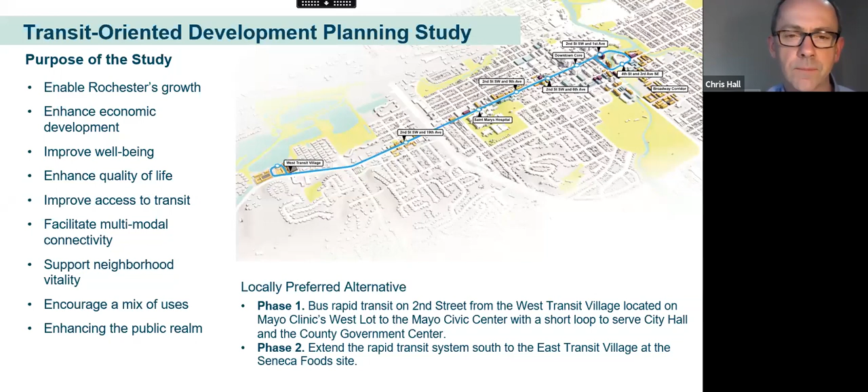And of course, there's a long background to this. This is the culmination of a series of plans which have happened over the last decade or so, and also they're a springboard for continued studies and investigations. This is certainly not the end of the line.

It's a way station on the way, and it's a level of study that takes things to the next level of detail, but then provides a platform for architecture, engineering, and more detailed funding applications and design studies.

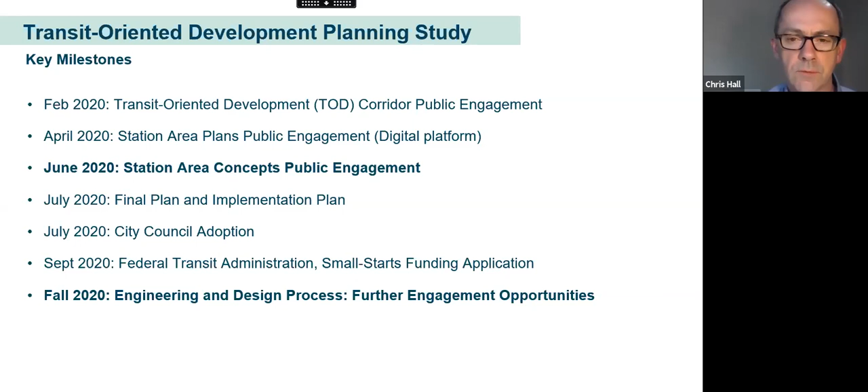Some of the key milestones, if you attended some of the previous webinars and presentations, you'll be familiar with this. But essentially at this point, we're in a public engagement round looking at station area concepts, and that leads to a series of decisions and finalization of this plan, which then becomes the basis for further engineering and design detail processes that will begin over the summer and really move in full speed ahead in the fall this year. So moving on to the vision.

There are 3 key principles we wanted to promote through this process, and we stepped back right at the beginning, and these are concepts that we established early on and which have continued through the process. We want to prioritize well-being.

Rochester is a city that's got great open spaces. It's got larger lakes, it has creeks, it's got rivers. It has a series of connections to open spaces and nature. We really wanted to make sure that people could have enhanced access to those spaces as a result of this transit. So we've spent a lot of time investigating how you can improve connections to open spaces, supporting well-being in terms of exercise and health, but also providing a framework which allows people to walk instead of drive and to bike around as well.

A strong mobility network is about how this rapid transit route also connects to enhanced bike connections and enhanced pedestrian frameworks around immediate station areas, allowing people to move around in healthy ways, but also move around very efficiently between home and places of work, and to get to retail and other services and community services they need. And then, guiding smart growth.

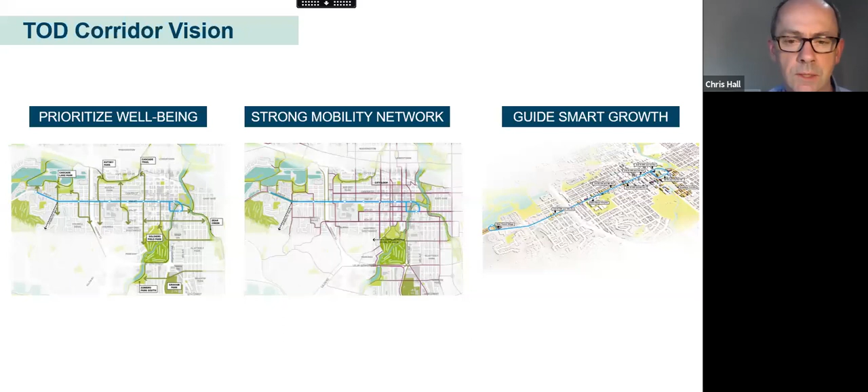We really want this to be a smart way to achieve the city's growth goals by organizing future development in a way that relates to transit, but also making sure we get the right kind of development - retail, community services, affordable housing - so that all of the needs that today's and future residents have can be met within the city. So those are the 3 underlying principles, and you'll see some of these ideas come through as we investigate in detail.

As we mentioned before, we're organizing the rapid transit route into a series of districts: the West Gateway, between Highway 52 and out to the West Transit Village; what we're calling the City Corridor, which encompasses St. Mary's to 6th Avenue; and the downtown core, which is 6th Avenue around to the government center. Those are the 3 main phases we're focusing on tonight and as part of this process.

And then, of course, there'll be a future phase relating to the downtown southeast waterfront and the Broadway corridor. That will be aligned to further investigation of the 2nd phase of the locally preferred alternative for the transit route - investigation of future extensions to the south, which will impact the Broadway corridor and the downtown southeast waterfront area.

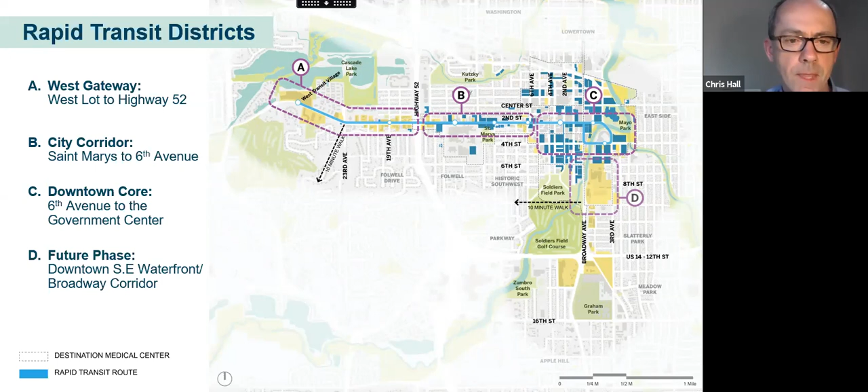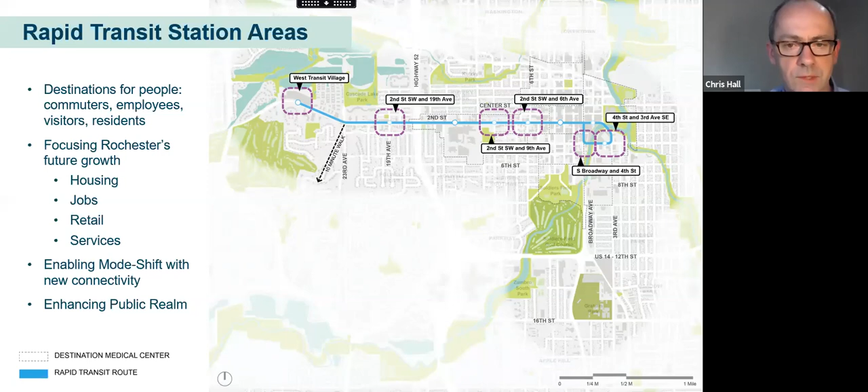So tonight we're going to look at a series of station areas. These are examples - it's a range of stations and locations, not every single one, which will be really serviced by rapid transit and have the potential to see transformation. These are places that are destinations, but also places where we can expect to see future evolution of housing, jobs, retail, and services, and also the places where we actually enable this mode shift - where people are able to get out of their cars and use transit, walking, biking. These are the hubs where that becomes a reality.

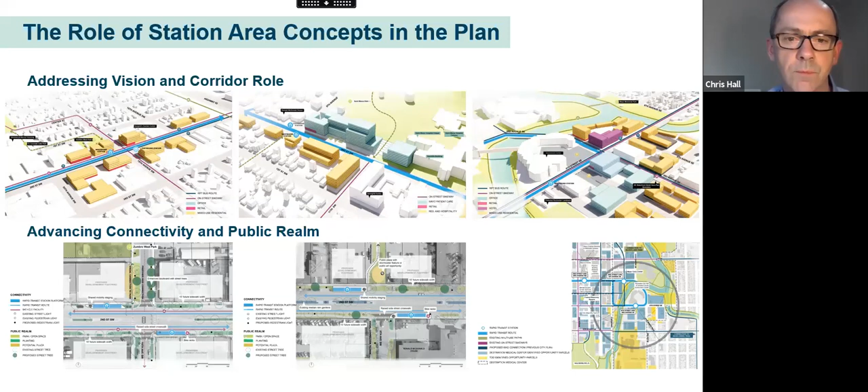What you'll see through this presentation and also the information that's online is a series of station area concepts. Those consider the vision and the role in terms of the future evolution of those station areas in terms of development, but also how we advance connectivity and how we enhance the public realm. These are examples of what we'll go through in a little more detail in a moment - the kind of information that we'll be presenting next.

The kind of things that we're interested in hearing back on are: how can we enhance these station area concepts? What type of retail or community amenities could be included, and how is that different between different stations? How can we enhance our ideas for public spaces, which again have different functions and different numbers of people using them? And then, how can we encourage people to walk or bike to the rapid transit stop? So that may be some ideas you have about how we can enhance some of the connections that we're proposing.

So we'll talk through each segment and station area in turn, and Joni Gies with SRF Consulting will also be joining me in this, introducing the ideas around public realm and connectivity in particular.

So the first area we're looking at is the West Gateway, on 2nd Street Southwest, west of Highway 52. We see this area as an activated urban corridor and a point of arrival for employees and visitors.

This is a location that has connections right now, with quite extensive trail connectivity around Cascade Lake. But what we want to do is enhance the connectivity in this area, extending bike connections and the streetscape framework established on 2nd Street Southwest out as far as 23rd, extending it further west on 2nd Street Southwest to create a more comprehensive network throughout this area.

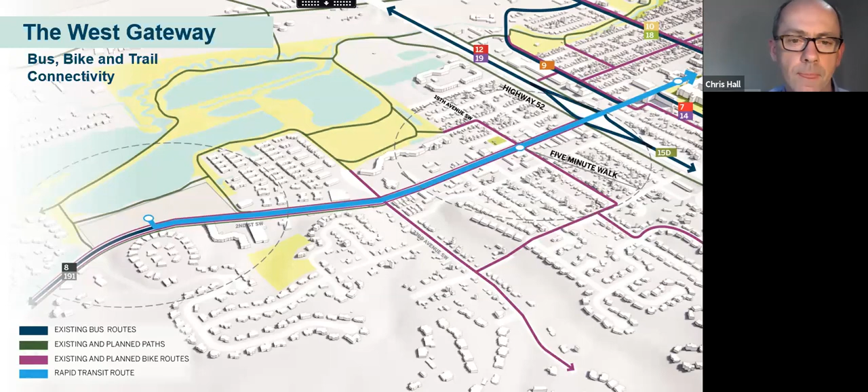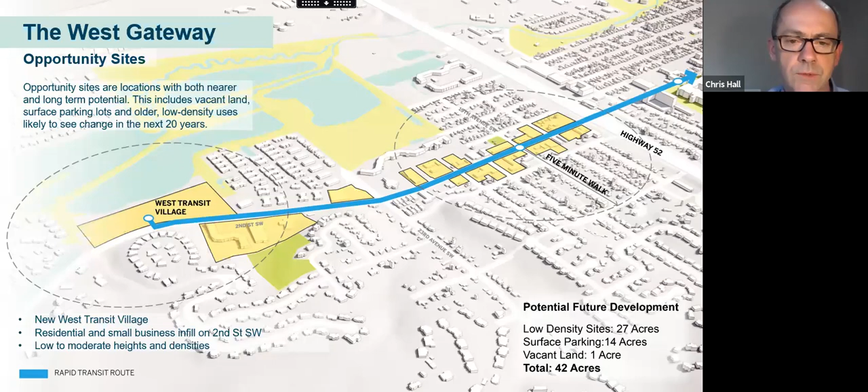We're also looking at future potential opportunities for new development. This is an initial assessment of areas that could see change over the next 20 years, including surface parking areas and some lower density, auto-oriented development which over time could be replaced. It's important to say we're not mandating this change - we're providing a framework within which individual property owners and businesses can make their own decisions. But we anticipate over the next 20 years many will see real opportunity, particularly with rapid transit coming into service.

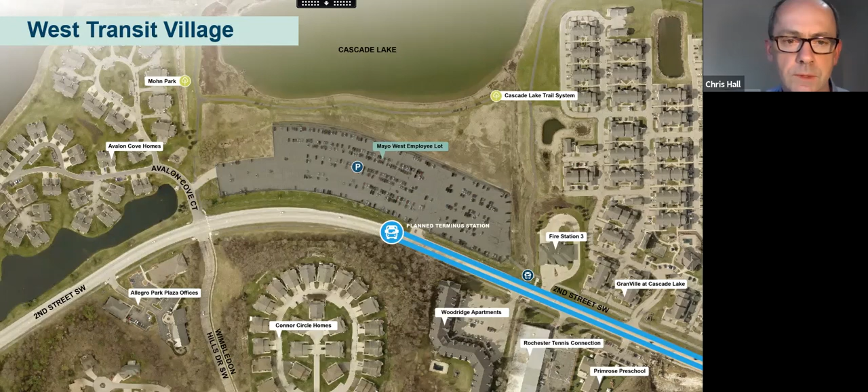Our overarching principles for the West Transit Village are to promote mixed use - residential, retail, potentially some small local office, maybe some smaller spaces for community services. It's a major pickup point for people coming to parking facilities and making a direct transfer onto transit, allowing them to get to downtown without driving in. There will be many activities here.

Mixed use buildings should have very active ground floors. We want high degrees of transparency, a sense that people are in the buildings, a relationship between what's happening inside and what's happening on the street. Streets should be lushly and richly landscaped, and designed to support walking, biking, and transit.

This is also an opportunity for new homes for Rochester residents. We're really interested in seeing local needs met as part of this process as well.

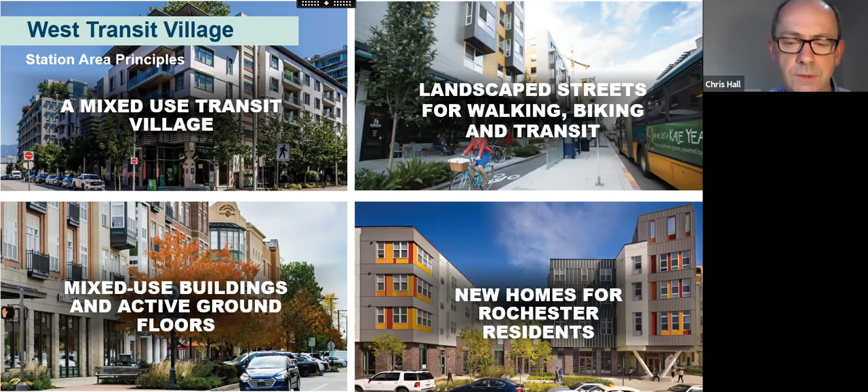This is the framework being proposed, with lots of details still to work out through subsequent phases. The fundamental idea is that the transit route would come west, turn into the site, have a short loop back on itself through the site, then back out onto 2nd Street again. The station would be on the interior of the site. The loop street would be very close to a parking facility, but it's also where we would focus retail and service activity.

We see the potential here for residential development through the balance of the site. There will be other parking facilities, either purely for public use or for resident use, along with a series of blocks and residential development opportunities organized around high quality streets, and also around a new public space - a strong public space for use by everybody, public to the whole city, to all residents.

That space will connect through from 2nd Street Southwest through the site and then out to Cascade Lake. This is also an opportunity to enhance bike connections so that people traveling to Cascade Lake, cycling or hiking around, can also get out to 2nd Street or vice versa.

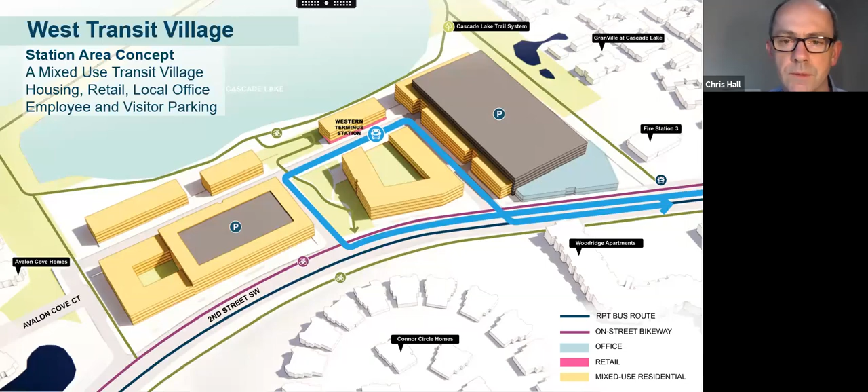We also think 2nd Street will become a really strong address as well. Development comes up 2nd Street, homes will face 2nd Street, and it will become more normalized - less of a suburban highway with a surface parking lot, and much more part of the fabric of the city. So next - Joni, do you want to talk through the public realm?

As Chris had stated, one of the really big moves from an urban design perspective is this significant green space in the heart of the West Transit Village that is making both a visual and a physical connection between 2nd Street and Cascade Lake.

We really want this district to be very supportive of walking. So all the streets are proposed to be lined with generous sidewalks, street trees, and pedestrian scale lighting to enhance safety and security as people move through the district, supporting walking for commuters, retail users, residents, and visitors.

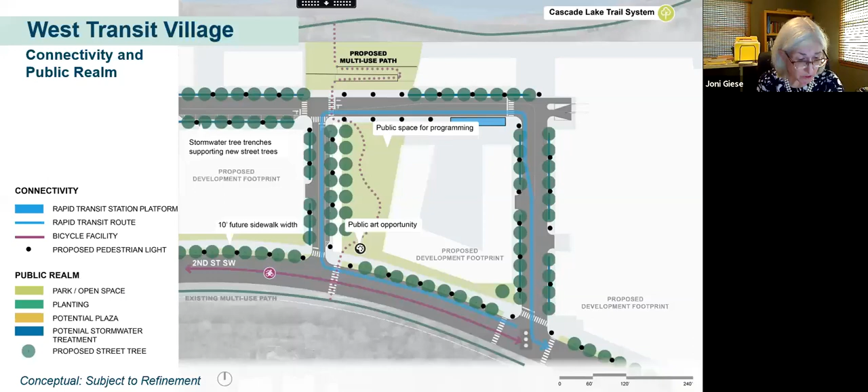In addition, this concept proposes some sustainability principles, such as harvesting stormwater from the site and using that stormwater to irrigate the new street trees along our streetscape.

This is a section through 2nd Street, as you can see in the upper right-hand corner, looking east towards downtown. Currently the streetscape treatment on 2nd stops at 23rd Avenue. As Chris was talking about, a very important move being recommended is to extend that streetscape treatment out to the West Transit Village, creating a very walkable neighborhood that people would be comfortable moving through between the West Transit Village and uses further to the east.

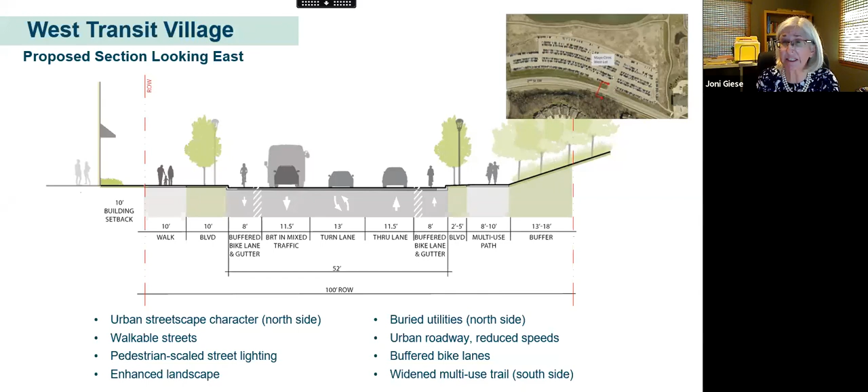That means incorporating pathways on both sides, set back from the street with a landscape boulevard that includes street trees and pedestrian scaled lighting. We're showing buffered bike lanes to improve comfort for bicyclists, and we're showing the buildings in the West Transit Village coming up close to the street so they help create the street and define it as a public realm space that people are comfortable inhabiting.

Okay, so the next area we want to look at is on 2nd Street and 19th Avenue.

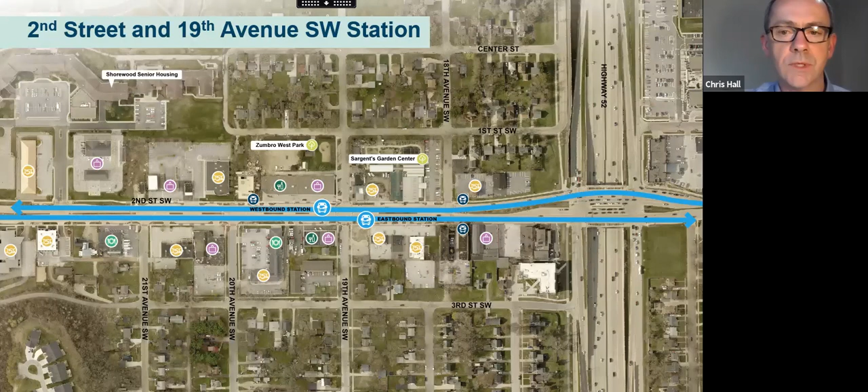We think this is a great opportunity to create a new community hub, a place where existing residents could come for shopping and services, a place some existing residents may want to relocate to, and a place future residents can live. This would be transit-oriented development that also incorporates retail services, community services, enhanced streetscape and public realm, and places for people to gather.

We see this as a very vibrant local neighborhood hub with a range of activities that is very attractive, and that attractiveness also encourages people to walk and bike to this location where they can access transit.

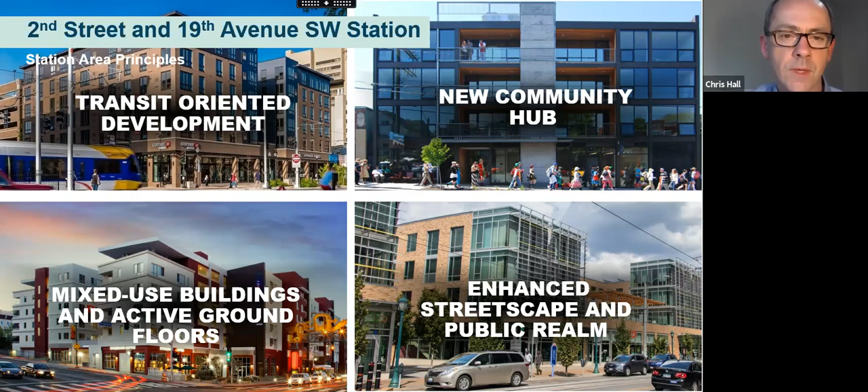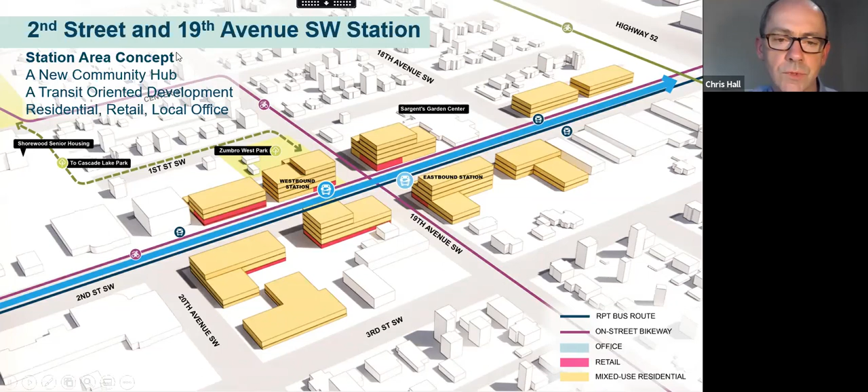Buildings may become more residential further from the intersection, and may step down in height as well, but we hope this will be a really connected place. We have ideas for creating and enhancing bike connections through to Cascade Lake Park and enhancing pedestrian connections via Zumbro West Park. This would be a neighborhood hub at neighborhood scale, with 4- and 5-story buildings right around the intersection, and active retail and ground floor spaces.

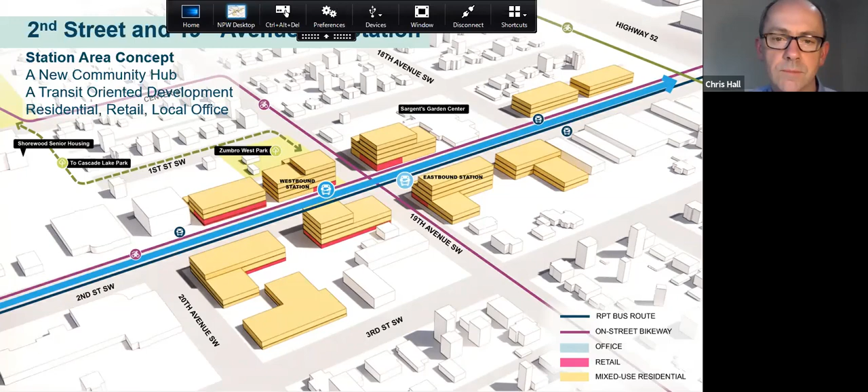From the public realm, the light blue boxes indicate where the proposed transit platforms would be located. Adjacent to those platforms, the idea is to provide space for people to securely store their bicycles if they'd like to bike to these transit stops, and also places to stage shared mobility, such as motorized scooters. This node already has some significant and really nice streetscaping.

The goal is, as redevelopment occurs, to continue to reinforce and strengthen that streetscape to create a comfortable walking experience for neighborhood residents walking to the platforms and to the businesses along 2nd Street. The concept also shows raised crosswalks along 19th Avenue.

This will keep the crosswalk at the same elevation as the adjacent sidewalks. We see this as a benefit for pedestrians, particularly those using mobility devices, because they will stay up at the sidewalk level, not having to go down to the street and back up.

Another move we are proposing in this concept is a pedestrian plaza along 19th Avenue. That plaza will help create a visual connection to Zumbro West Park just to the north, so people understand there's a park nearby that can be used.

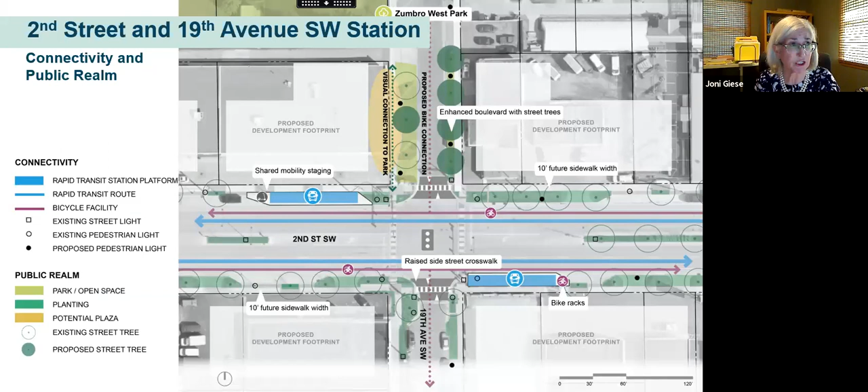We're showing dedicated travel lanes in the street for business access and transit, labeled as BAT lanes. In addition, we're preserving the bicycle lanes that currently exist on the street today.

To be consistent with the zoning code for this area, which is a TOD corridor, we are providing generous 10-foot sidewalks on both sides of the street, set back from the roadway with landscape boulevards.

The buildings are placed so that they come up closer to the street edge, to the right of way, to once again help define that street as a public realm space.

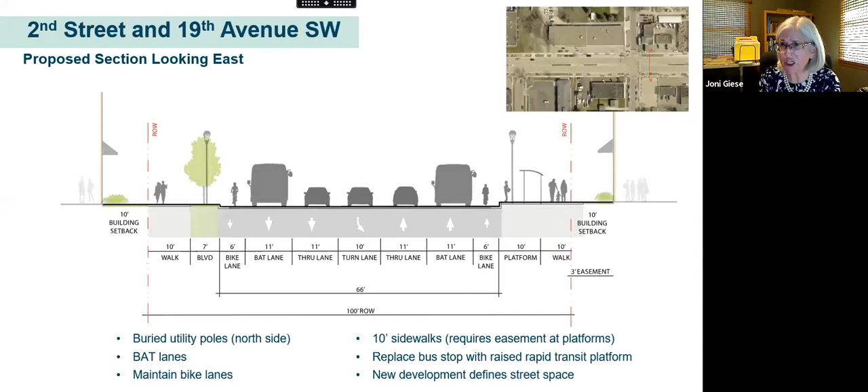Depending on the uses that occur in these buildings, if they are retail, the space between the building frontage and the right of way could be designed to support that retail usage and further activate the street space.

Next. I think we wanted to stop at this point and give people the opportunity, if there are any immediate questions, whether about the study overall or any of the specifics you've seen for these two locations, to ask them now.

Actually, we have a couple questions coming in, but Paula raised her hand. Joni, can you help me get Paula unmuted so she can ask her question? Paula, are you there? Looks like she's muted, Joni. Okay, something with a rollover, I couldn't get the arrow to click unmute.

I have three or four short questions. My first is actually a compliment that y'all are doing raised crosswalks. I'm a person with disabilities, I have multiple sclerosis, and I've been advocating for raised crosswalks because they make it easier for me to get around and for people with low vision, as well as for safety, since they act as a traffic suppressor subconsciously.

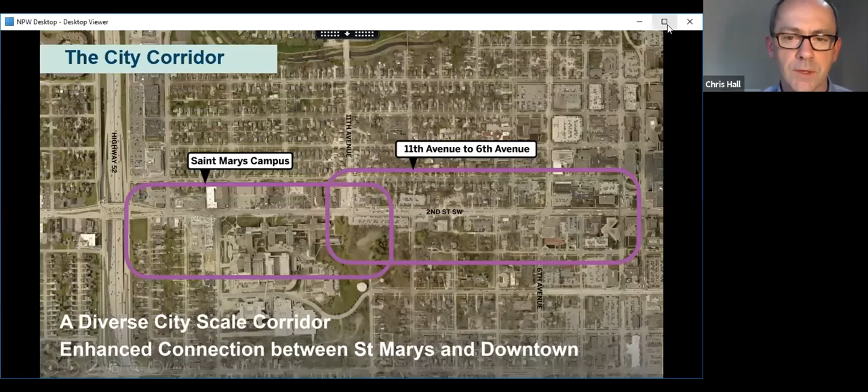So this encompasses the St. Mary's campus and then also the 2nd Street corridor from 11th to 6th. We really see this as part of the central city. Cities are growing along their corridors now, and traditional downtowns are changing in many ways in terms of function and activity. So we see this as a diverse city scale corridor, an extension of the traditional core, and an opportunity to enhance connections between St. Mary's and downtown and core Mayo Clinic facilities as well.

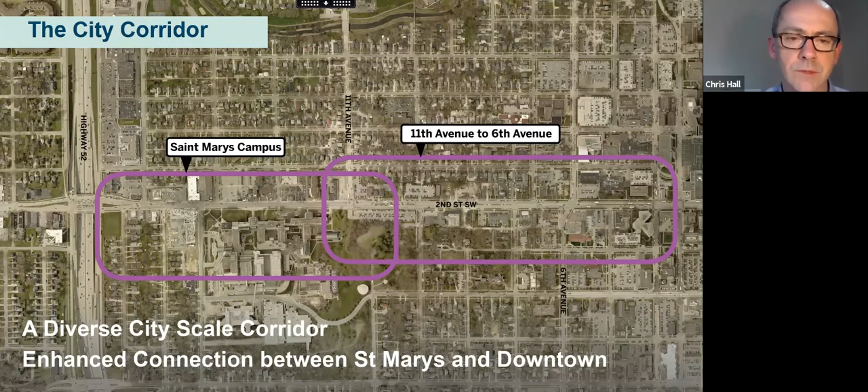So a series of proposals for enhancing connectivity for this area as well. It's very well connected in many ways, and we're proposing 3 station locations: one right at St. Mary's Hospital entrance on 2nd Street, one around 9th Avenue, and one around 6th Avenue. These are around a 5-minute walk or quarter-mile spacing, which is typically what we see in more urban districts.

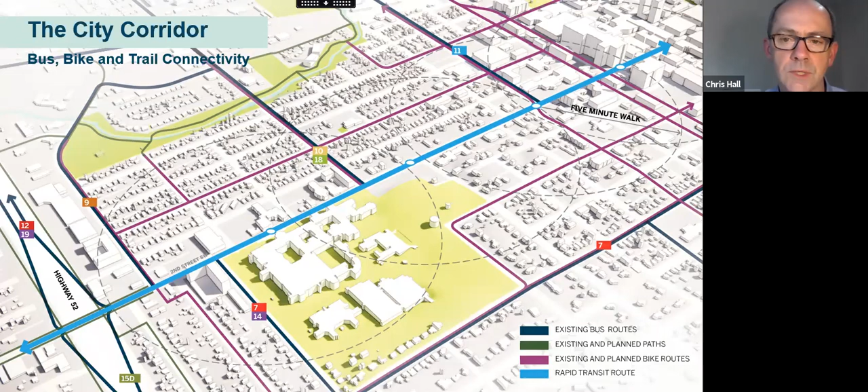And again, a series of opportunities that could arise over the next 20 years. One of the areas we're really interested in and focusing on, as it's been subject to previous planning and significant thought in the past, is the area between 11th and 9th, to the immediate east of St. Mary's, on either side of the street.

We see this as an idea of an expanded health district, taking St. Mary's as an anchor but expanding out, based around patient care but also potentially other economic activities closely linked to that patient care. A place for hospitality, retail, and housing—additional activities beyond core patient care and medical employment. New public spaces: this location could really benefit from new public spaces as new development occurs, along with enhanced streetscape and public realm, following a lot of the principles we've seen elsewhere.

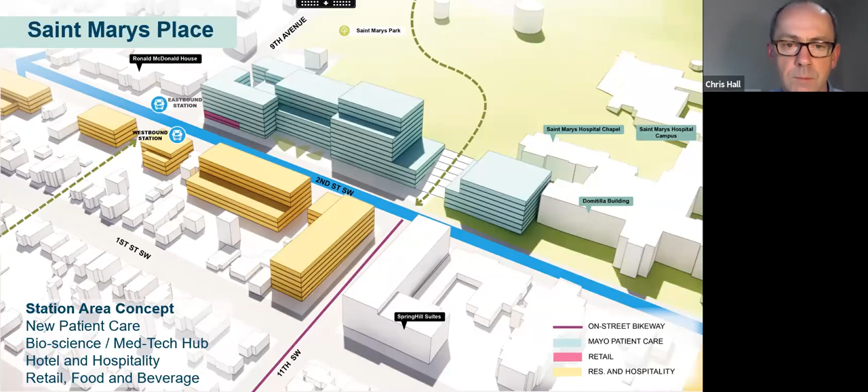A few things to point out: we are bringing buildings to the street, organizing with a strong relationship to the street, and parking would be incorporated within buildings with access to the rear of buildings.

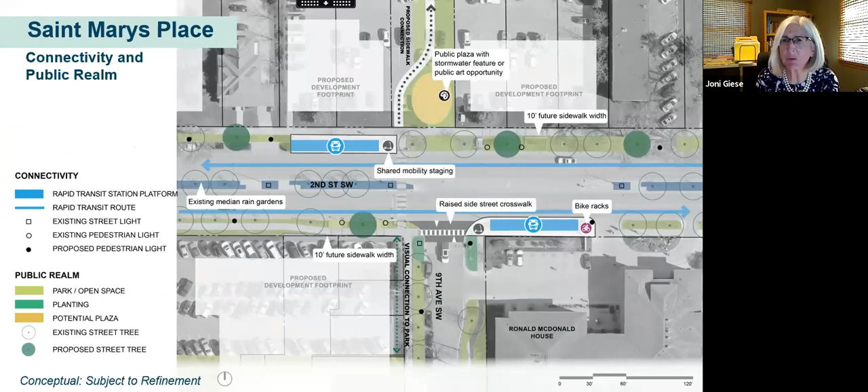This station area concept is located a little further east, right at the intersection of 9th Avenue and 2nd Street. Once again, one of the primary moves proposed as part of this station is the creation of a public open space associated with the station, just north of 2nd Street. This creates a wonderful opportunity for visitors, employees, and possibly volunteers working in this adjacent area to have a space to go out and enjoy during breaks, or just to relax and get away. Associated with that open space, we're bringing forward a concept from a previous city plan: a mid-block pedestrian connection from 2nd Street up to Center Street, to once again provide enhanced pedestrian access to this transit stop. Lastly, similar to the 19th Avenue station, 9th Avenue is a fairly low volume street, so we're once again proposing a raised crosswalk at this location as well.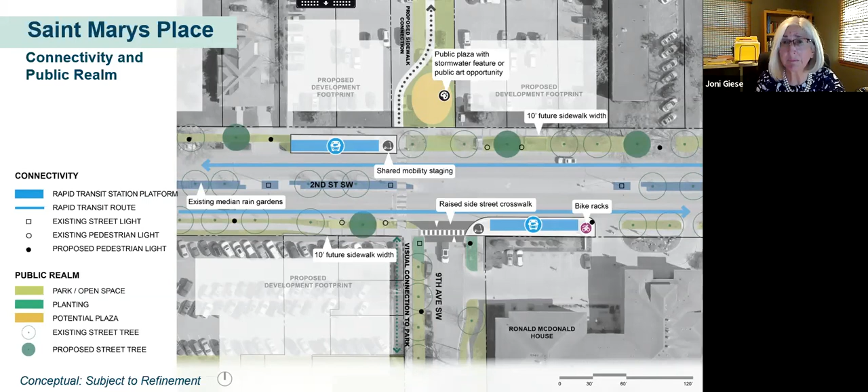So looking at a street section here, which is taken just to the west of 9th Avenue.

Once again, we are showing those travel lanes on the roadway dedicated to business access and transit. We are also preserving those wonderful, beautiful planted median islands that currently exist in the street, which also serve to treat stormwater. We are showing generous sidewalks on both sides of the street, set back from the roadway, with landscape median islands that include street trees and pedestrian scale lighting. And once again, we are having those buildings brought up closer to the right-of-way line, to help define 2nd Street as a public realm open space amenity.

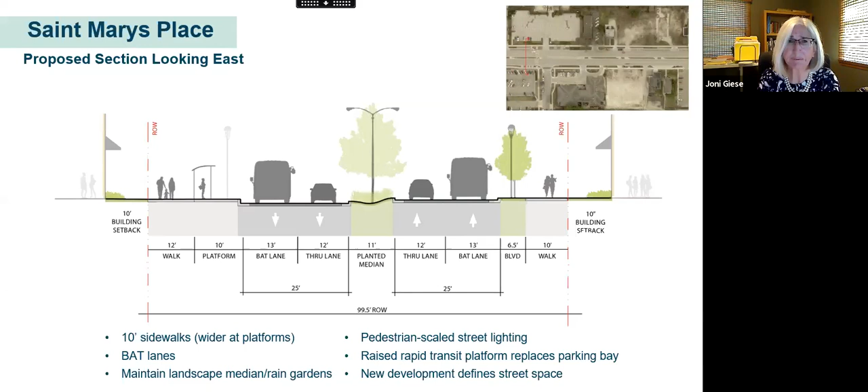So the next location to look at is 6th Avenue. This is really a gateway location right on the edge of the historic and traditional downtown, but also a transition from surrounding neighborhoods.

We thought of this as a downtown gateway. It really is the point where you feel like you're hitting downtown. It could have a wellness focus in terms of its employment activities and community service activities, but there's also potential for urban living, and for a range of housing types incorporating affordable housing as well.

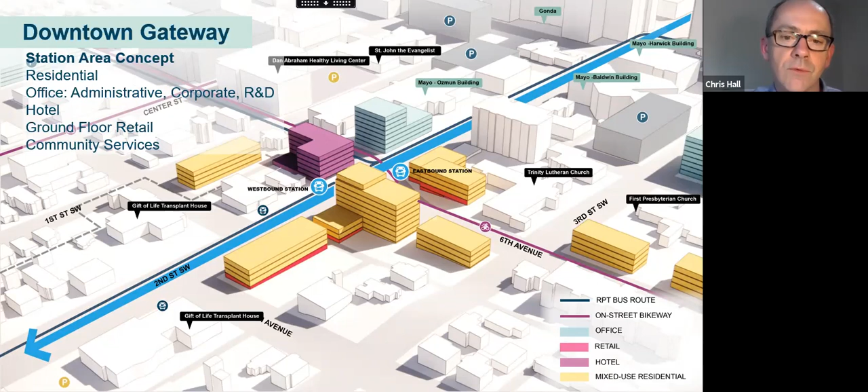Similar principles as we've seen elsewhere: gathering the tallest buildings, highest densities, and greatest mix of uses around the intersection. This intersection is also organized with platforms on either side of it in the direction of travel. After the intersection, it's also a place where we can enhance bike routes. So we're really looking to create a hub of focus, a sense of energy, and a sense of arrival for this location, then stepping down slightly in terms of heights as we move away.

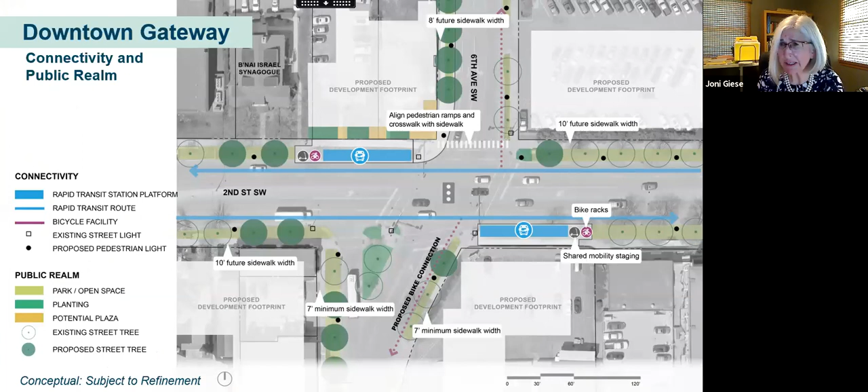From the public realm perspective, as Chris said, we're really seeing this as the gateway to downtown. In addition to having very generous sidewalks moving along 2nd Street, at this point we are also proposing that the sidewalks increase in width along 6th Avenue itself, because we're envisioning that a number of people getting on and off at this platform are employees walking to their places of employment. As development occurs in this station area, we also see opportunities to bolster the streetscape by providing additional boulevard widths and additional street tree plantings.

One thing I'd like to highlight here is on the very far right of the diagram — currently there are some very generous street boulevards and some very nice mature street trees in that section.

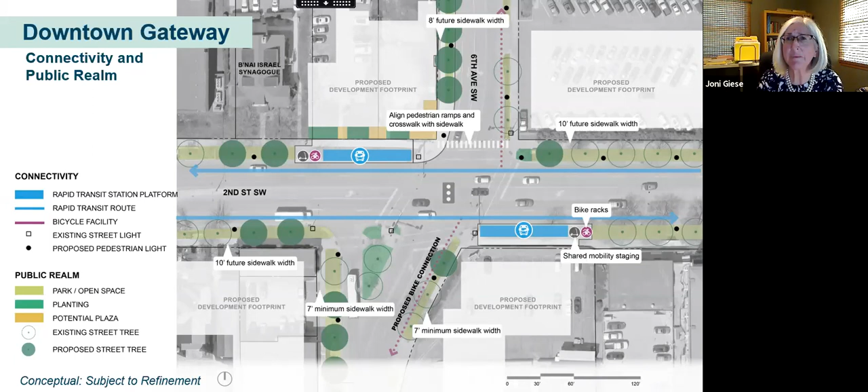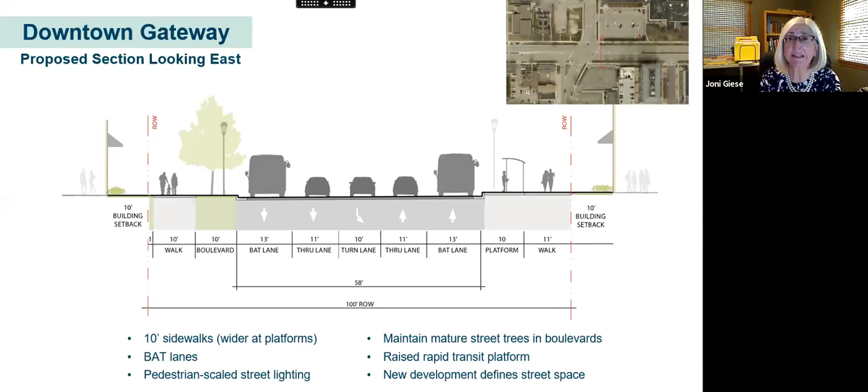Looking at our cross section, once again looking east towards downtown, one of the main goals for this streetscape is to preserve those street trees to the east of 6th Avenue. We really want to maintain that mature vegetation on both sides of the street. As we get closer to downtown, with the potential uses of those buildings such as office, hotel, retail, and residential, the space between those buildings and the right of way could be designed to support the interior uses of those buildings, creating spaces that can be enjoyed by hotel visitors, retail visitors, employees, and community residents.

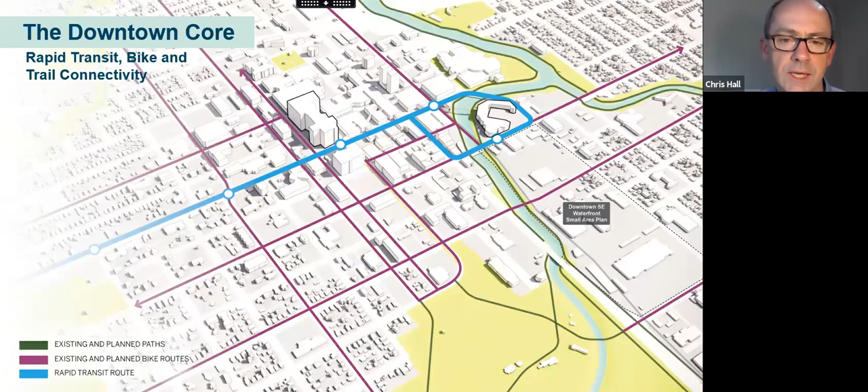The next area is the downtown core. This is where there are three stations: one downtown core station approximately around 2nd or 3rd Avenue, one past Broadway around 1st, and then one on 4th Street, creating something of a loop in this area. This loop represents the turnaround for phase 1 of the locally preferred alternative, and as you can see, it's connected to a series of other connections in the area.

These stations are preliminary and subject to further investigation, which will be evaluated against a series of criteria and then finalized through the architecture and engineering design phase of the project.

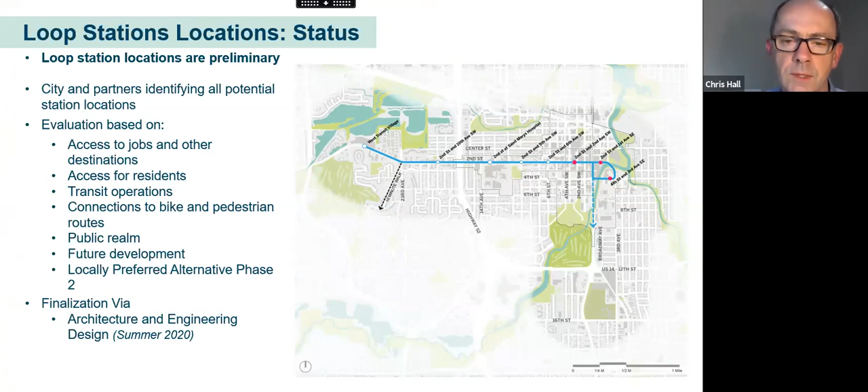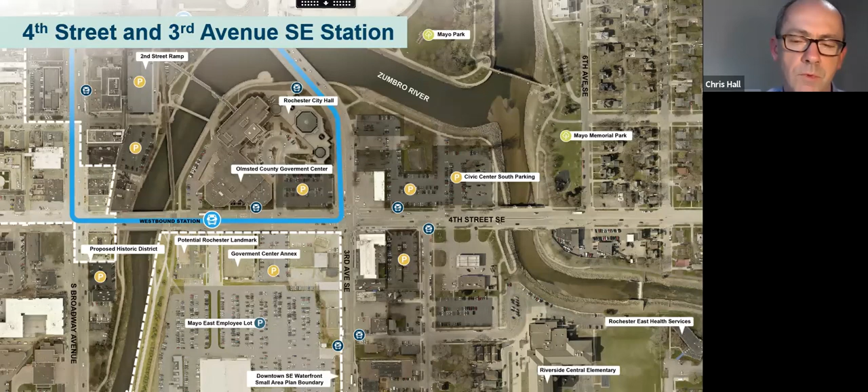As those decisions are evolving, we wanted to look into some of the locations where stations are likely to be placed. So this is 4th Street, just to the west of 3rd Avenue, essentially between the river and 3rd Avenue on 4th Street.

We really see this as a connected transit hub. It's actually where a number of bus routes come together already, and an opportunity for jobs-led growth. This area has the government district and government complex, so a significant number of office jobs and public service jobs already, and that can continue.

We also see this as a new central city neighborhood with a range of housing types in locations where people will be within 5 minutes walk of their home and a rapid transit station, but also a network of smaller open spaces. I think we're learning right now that people really value having access to smaller open spaces just within a few minutes of their home, so we'd want to see that incorporated.

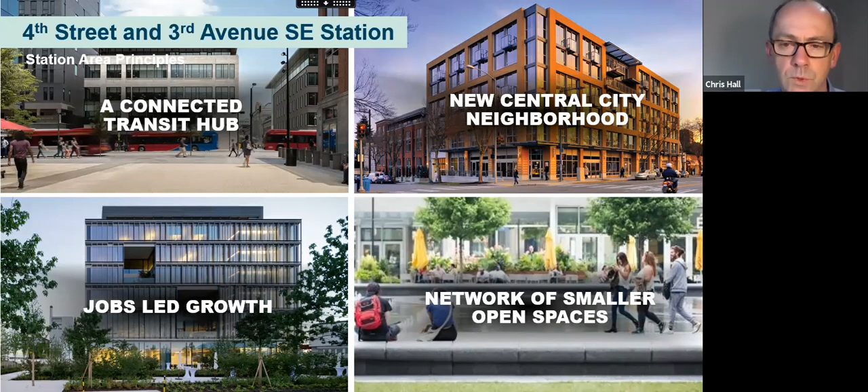So this is a concept for this area, with an idea for employment-led activities to the south of 4th, and then more residential around that, potentially a hotel on the northeast corner of 4th and 3rd. These uses will all evolve over time, but this also gives a sense of the potential scale in this area, strongly related to the scale of the government center, and not an unusual scale for a more central city environment like this.

But there's the opportunity for some new neighborhoods, a new riverfront neighborhood, enhancing connections in terms of bike links, pedestrian links, and interaction between different transit routes as well. So this could be a very dynamic area by 2040.

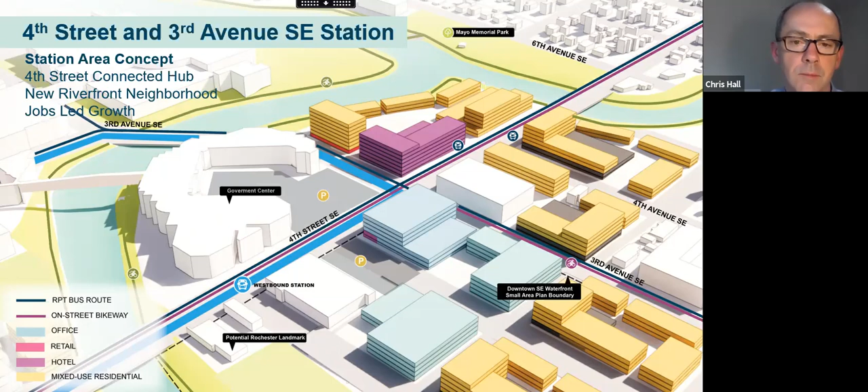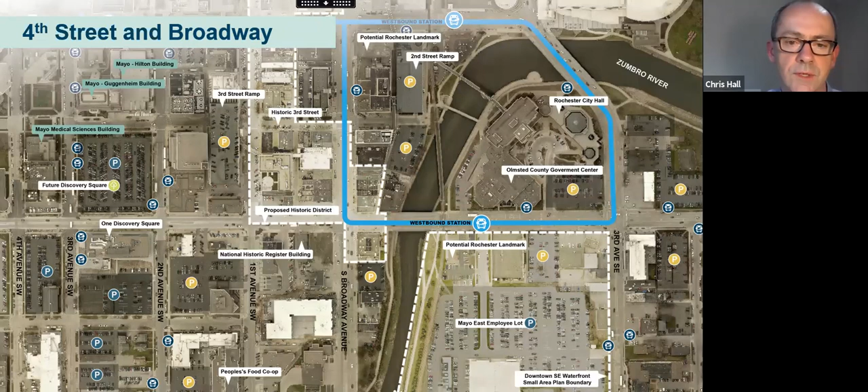We also thought we'd look at Broadway and 4th, because although there isn't specifically a station at this intersection, there's a lot of dynamics here, and it's very closely related to the transit investment. So we saw this as the crossing in many ways - there's a crossing across the river on the 4th Street Bridge, but you're also really crossing into the core of downtown once you hit north of 4th.

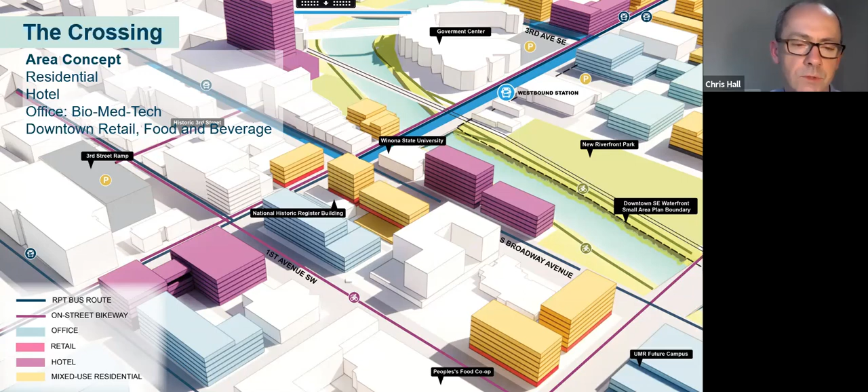It's really a Main Street kind of location, with the opportunity for collaboration and intersection amongst many different uses, an opportunity to really enhance the Zumbro River, and a growing central city area. This is a very mixed use development concept with densities and heights related to the surrounding context, but also opportunities to strengthen the riverfront and potentially create a new riverfront park with very strong public access both along the waterfront and to the water's edge.

This will be subject to a future planning study, the Downtown Southeast Waterfront small area plan area, so there are extensive considerations in the future linked to phase 2 considerations for transit.

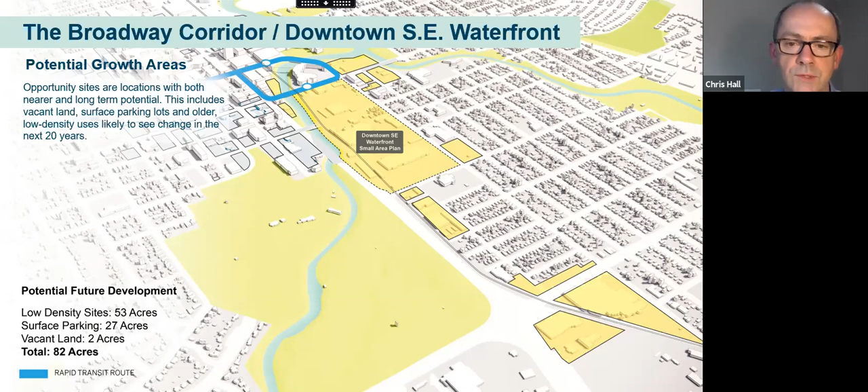A series of objectives which are really about extending the street grid and making sure that everything is completely connected to the surrounding framework, so there's strong interplay between existing neighborhoods and future development, and a rich series of open spaces available to people.

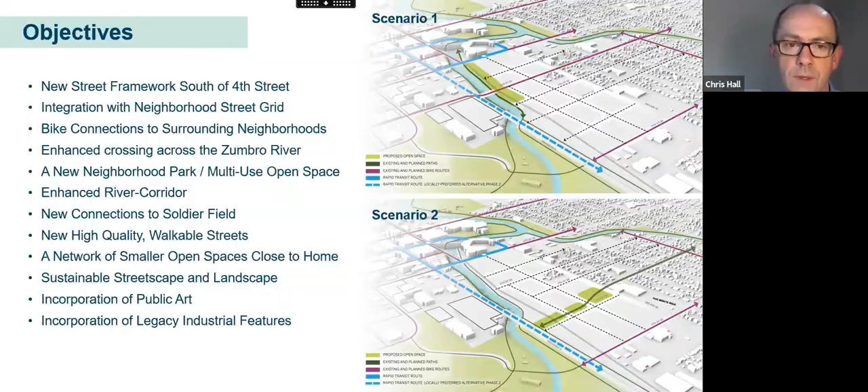Some of these we've talked about before - making sure this area has great streets.

And creates a new riverfront park for Rochester, which could be a very naturalized edge, could be more formal, or to be determined, but certainly a great opportunity for that kind of open space.

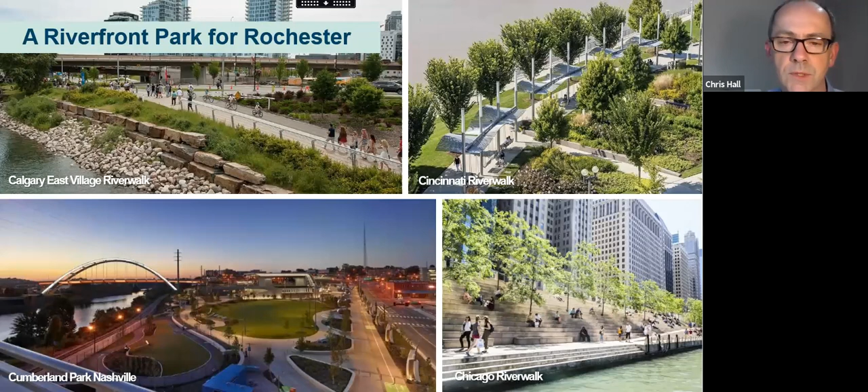And potentially a larger park or open space within new development as it occurs, and that network of smaller public spaces we were talking about, which people really value right now and we think will continue to value in the future.

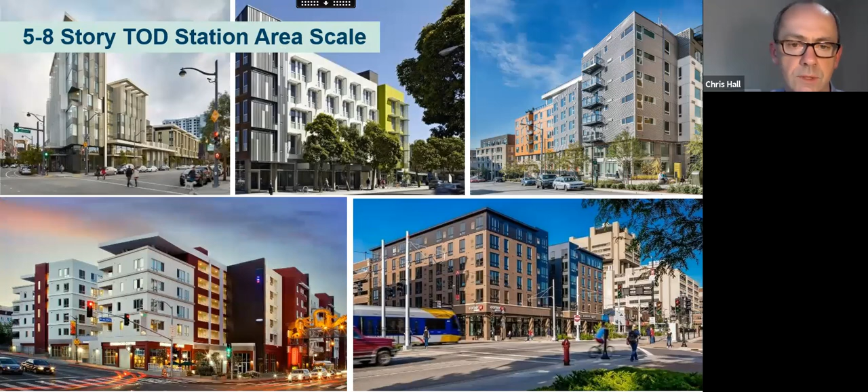And a range of different housing types, from a townhome scale, which allows development to transition to neighborhoods, and then to a more TOD station area scale as the transit alignment and station locations are resolved.

So I think we want to open up for further questions and discussion at this point.

Yes, Chris. We've had a few questions come in via the chat or the Q&A button that I want to make sure we hit. The first one was related to the West Station and the West Transit lot - that will be located on what is known as the Mayo West parking lot currently today. So I can answer that one real quickly.

The next comment, I think a good one, relates to a resident near the West Transit Village commenting about 2nd Street currently feeling kind of busy and quick.

Is there anything we can do in our street design that can help with that? Yeah, one of our ideas is to slow down traffic through the design that Joni presented, which would reduce speed. Right now after 23rd, speeds go up to 45 miles an hour. We'd look at reducing those speeds to something similar to east of 23rd. If the question is about reducing speeds even further, that can be investigated as part of the next stage of the study.

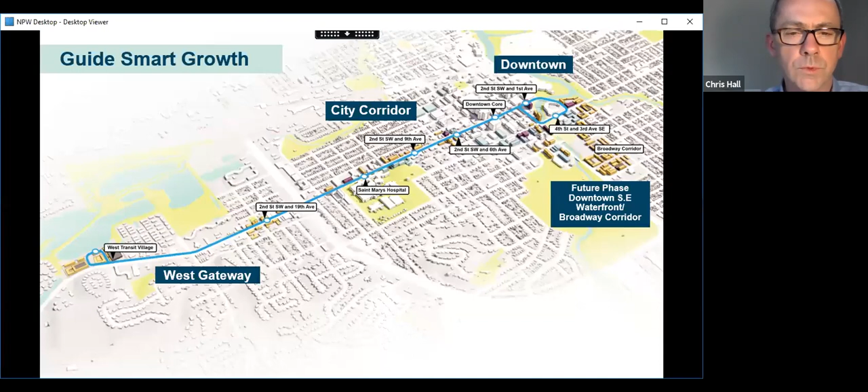With that, I don't see anyone else having their hand raised or any additional questions. Do we have our feedback slide next? Yeah, there's a couple more feedback slides next.